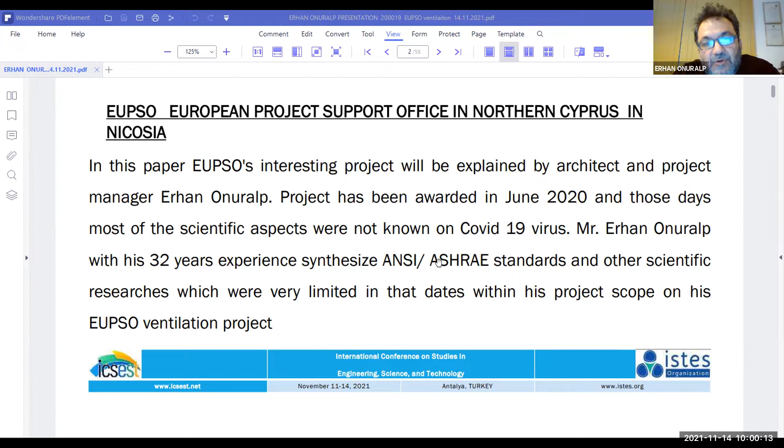From March 2020, we had the COVID outbreak in North Cyprus, and because of this, the project needed to be prepared urgently. But we had problems at that time — in 2020, we did not have enough data or knowledge on what to do against COVID spread in interior offices or interior spaces. So I took the responsibility and initiative on behalf of my team.

After big research about ventilation theories, we found out that displacement ventilation theory is very close to our aim of getting rid of COVID viruses in office spaces, to clean the office spaces from COVID viruses.

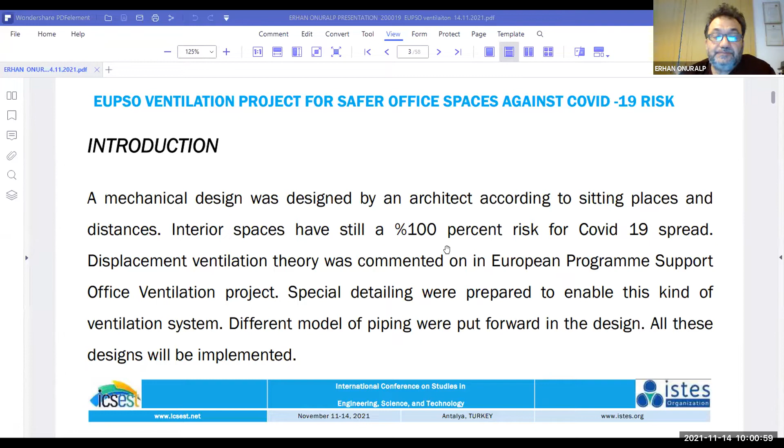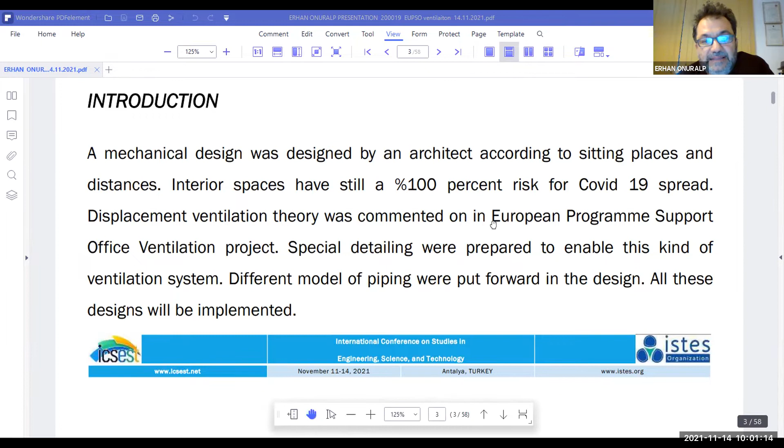My client also asked for a sample of a guarantee to have 100% risk removal — 100% removal of COVID spread in the spaces.

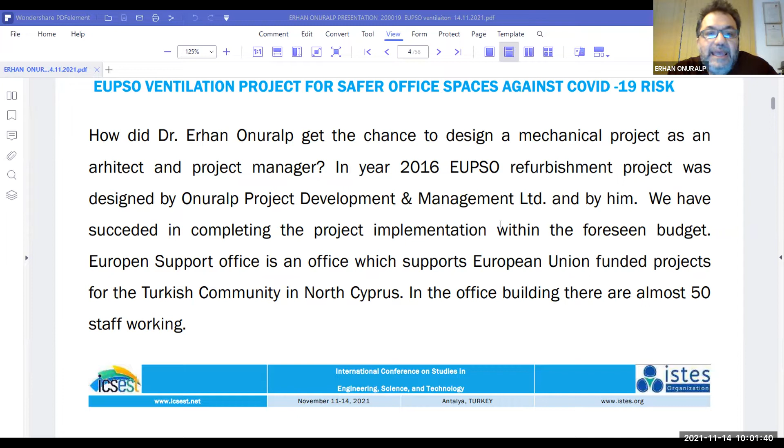European Support Office, EUPSO, is an organization that supports projects for the Turkish community in North Cyprus. I had also done their refurbishment project before, in 2016, and their project for internal space design.

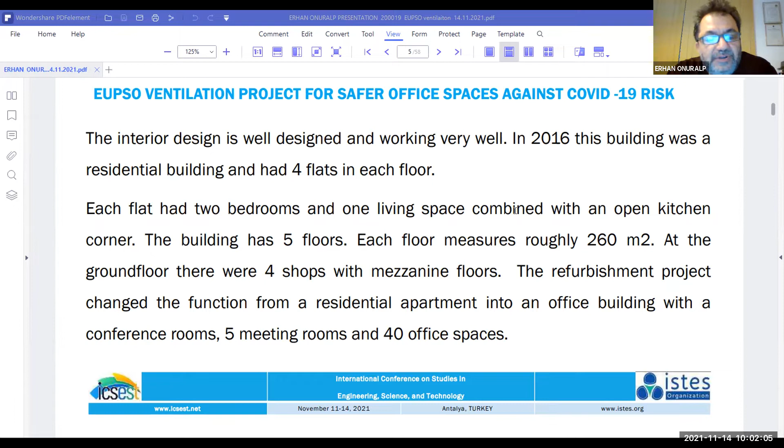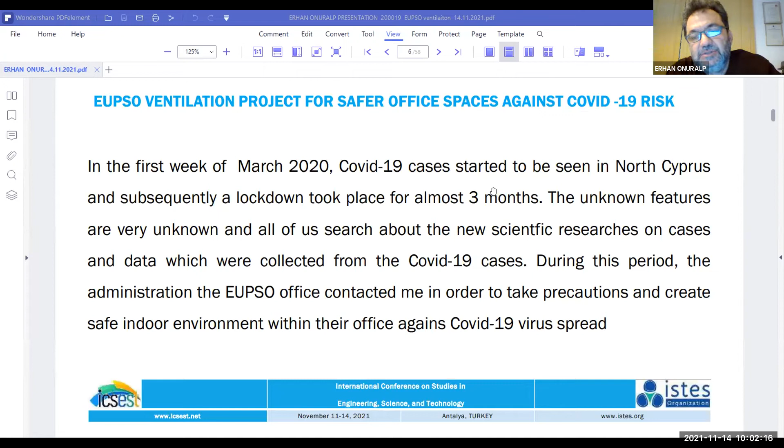We have 260 square meters on every floor, a 5-story building, and also a ground floor. On the ground floor we have the conference rooms and the entrance. This building is also renovated from a residential building, which we converted into an office building.

In May 2020, we started designing our project, and we clearly came to a point to have our layouts for the project.

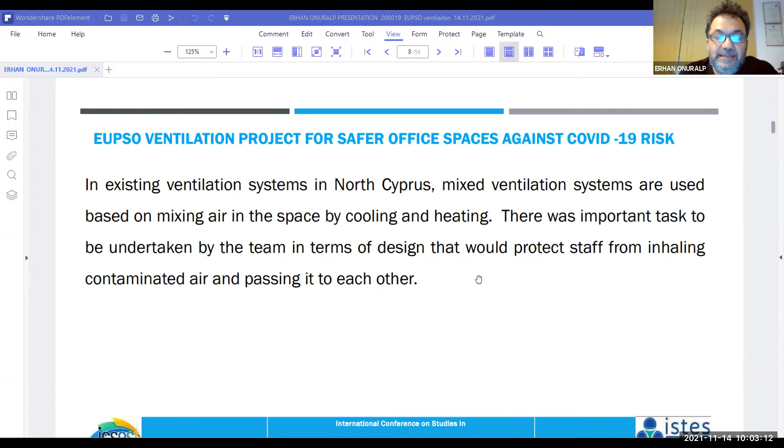According to our research, before the COVID outbreak we had a ventilation system, a mixed ventilation system. Because of this mixed ventilation system, we have been living with problems nowadays also, because the ventilation mixes the air inside the space, and when it mixes, it gives too much danger to the people inside the building. Now I am going to pass to the building.

I want to show the building to us first of all, from the bottom.

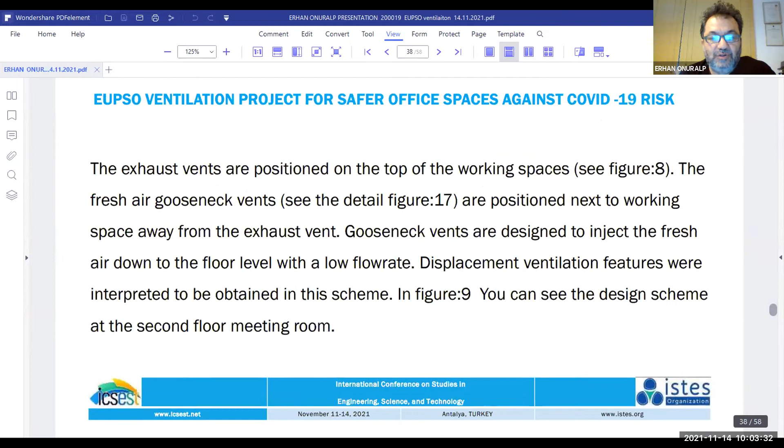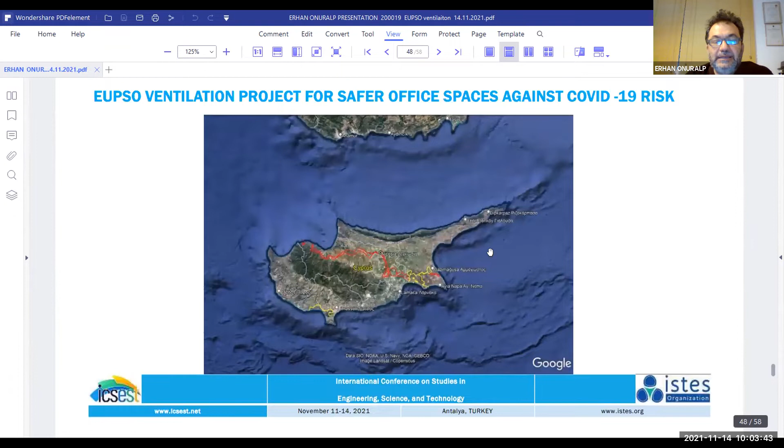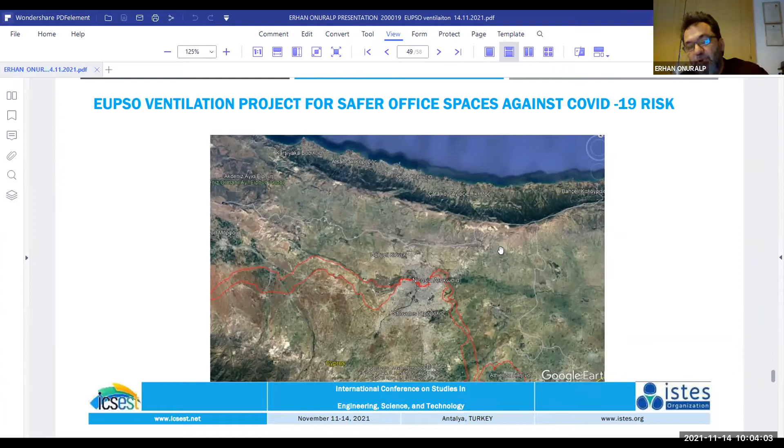Yes, we are in Cyprus. This is Cyprus in the East Mediterranean Sea, and the office building is in Nicosia. Nicosia is the capital city of Cyprus, and we have this type of border — two sides, south and north. The north side belongs to the Turks, and the south side belongs to the Greeks. This is the walled Nicosia, and our building is close to here.

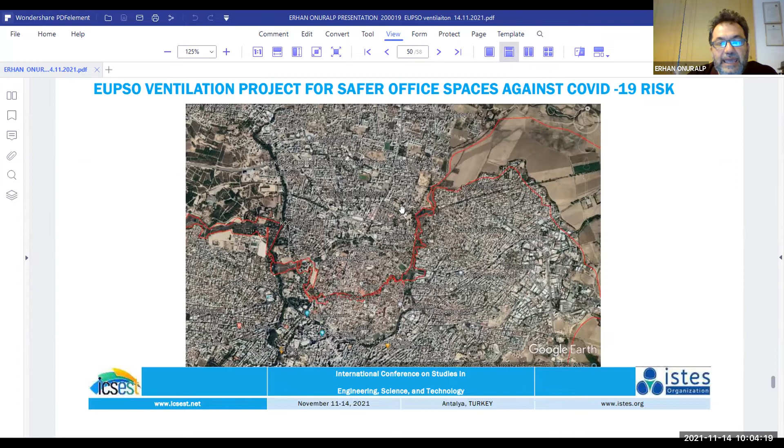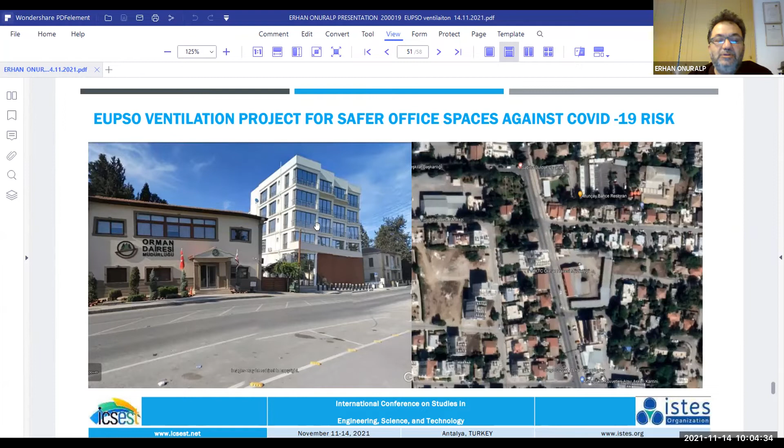This is our building, and this is the site plan of our building. This is the road, and the road goes to the north. This is our building that's going to be projected for ventilation.

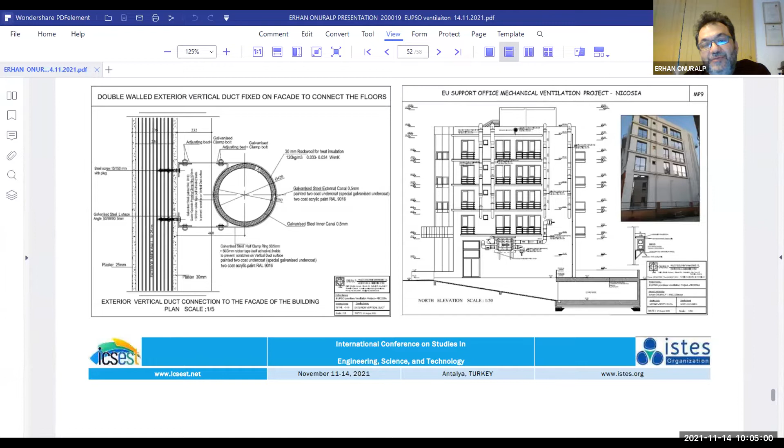I prepared this paper for the guests to show the architectural aspect of the ventilation system from the beginning. The drawings are like architectural drawings, the details are architectural details, and everything is handled differently.

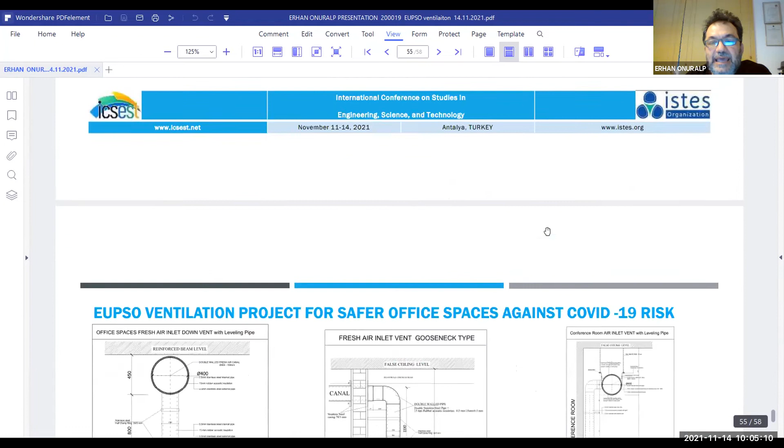On the ground floor, we have our conference room, and we have the ventilation — fresh air ventilation and exhaust ventilation pipes, two pipes. In this project, we have a different interpretation of ventilation: we take fresh atmospheric air inside, and we take the polluted air from inside the space to the outer space. So we have two pipes.

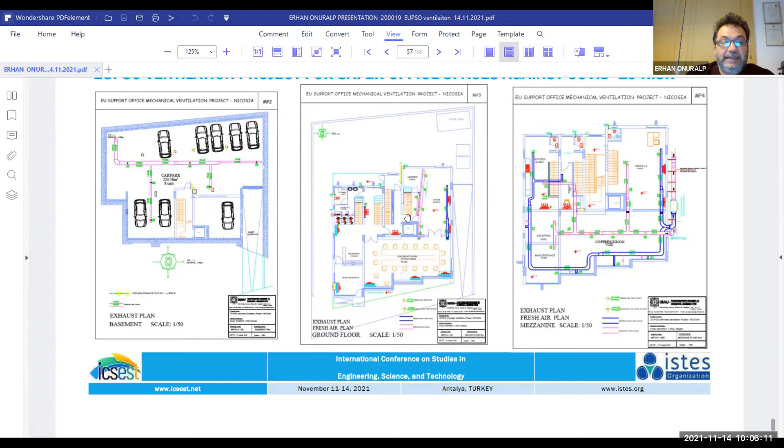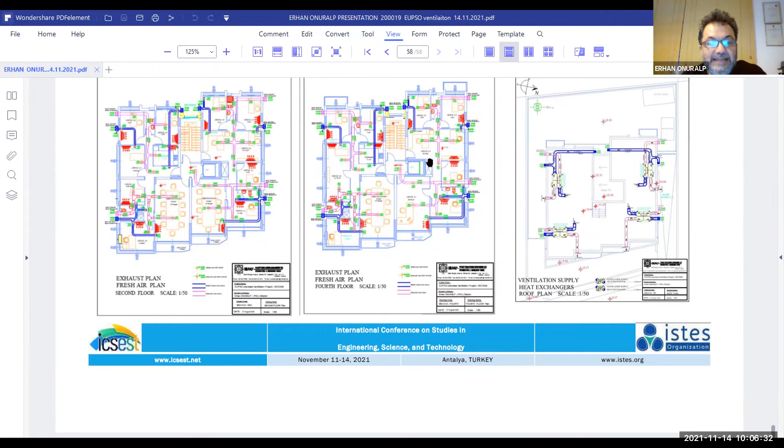One is fresh air, the blue ones, and these are the violet ones, which are the exhaust airs. So the machineries are at the top, and remove the air from the building. And every floor we have this type of short pipes that continue at the ceiling. They are short pipes, which is more efficient.

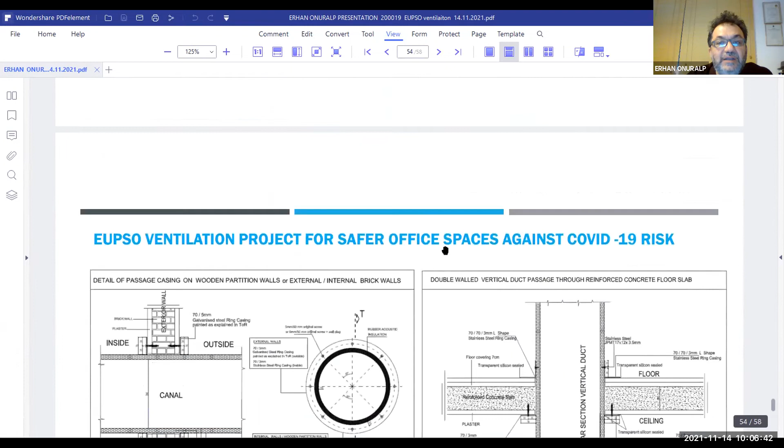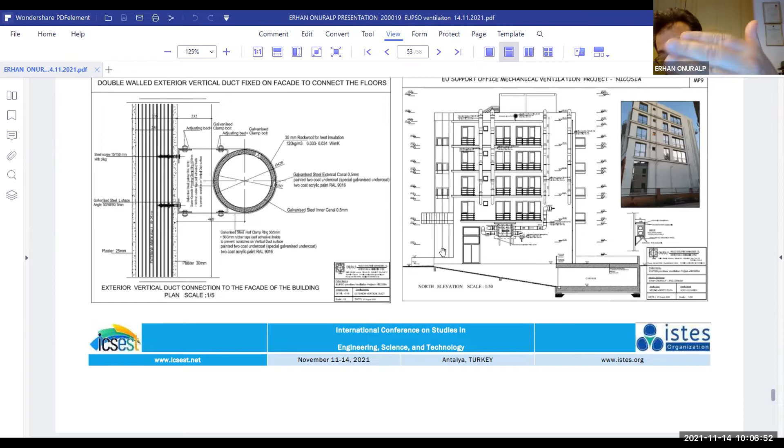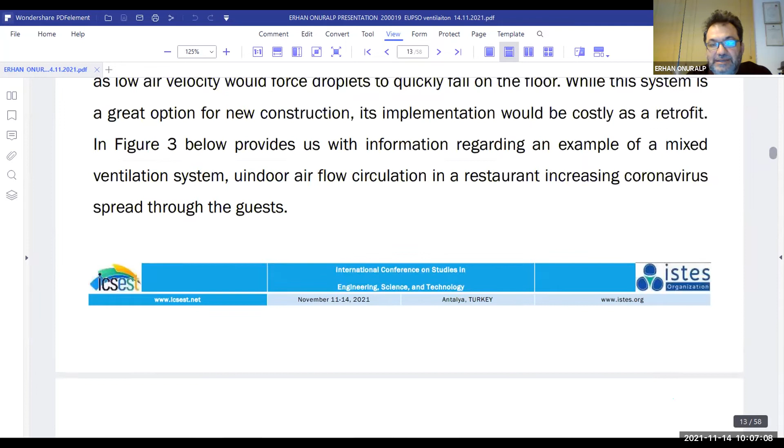So the problem is here that we are doing this while the building is in use, and we are now implementing a project of ventilation here. So for our ventilation scientific outline, if you can understand the project simply, I think we can come to what's the problem in front of us.

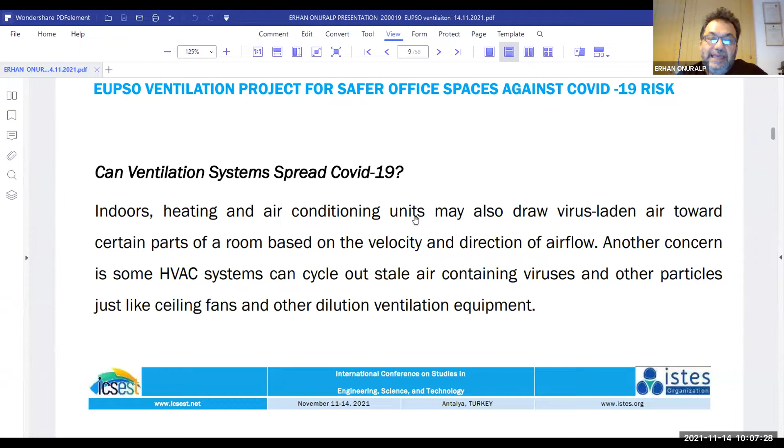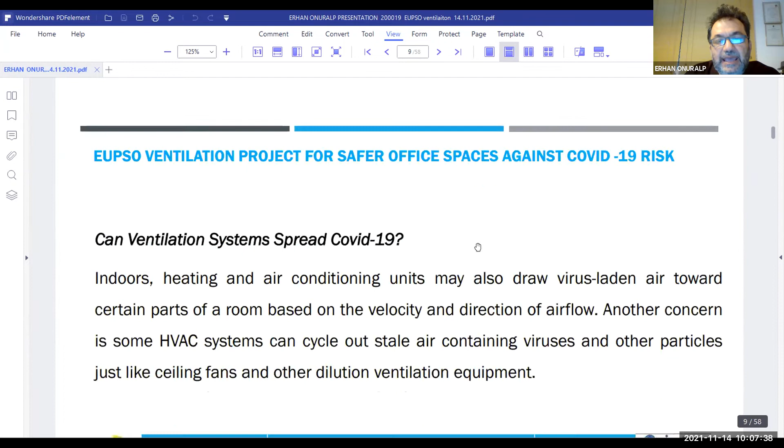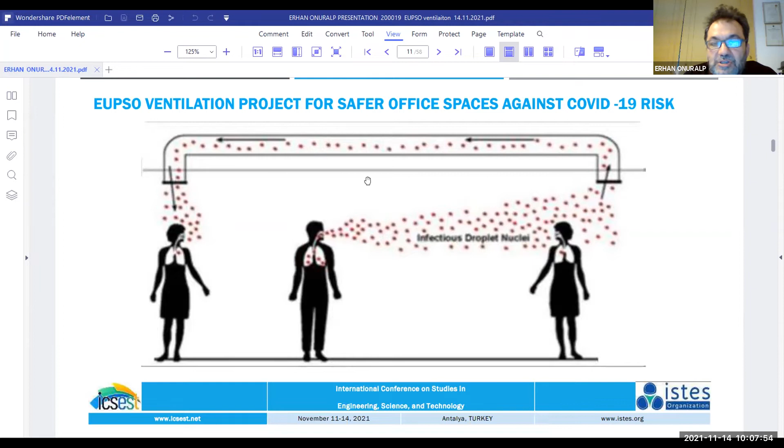The first problem is: can ventilation system spread the COVID virus inside the building? So we should take precautions about the ventilation system and keep this danger in mind. Here you see these pipes can also carry the droplets, nuclei of the viruses between the spaces. So this is also taken into account, and we have precautions about that.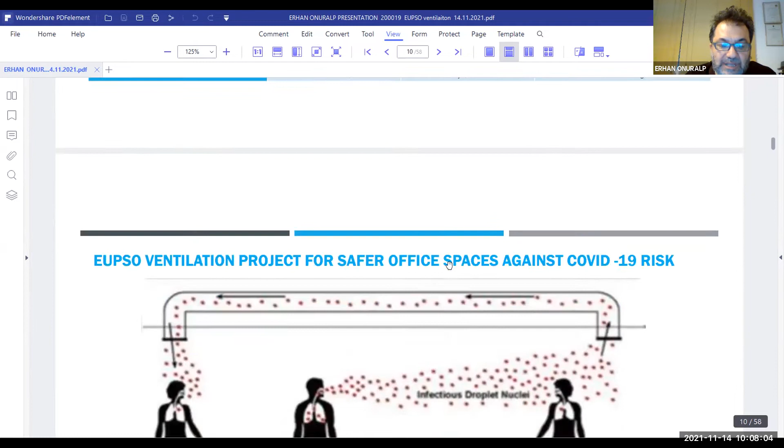So we select displacement ventilation. So what is the displacement ventilation?

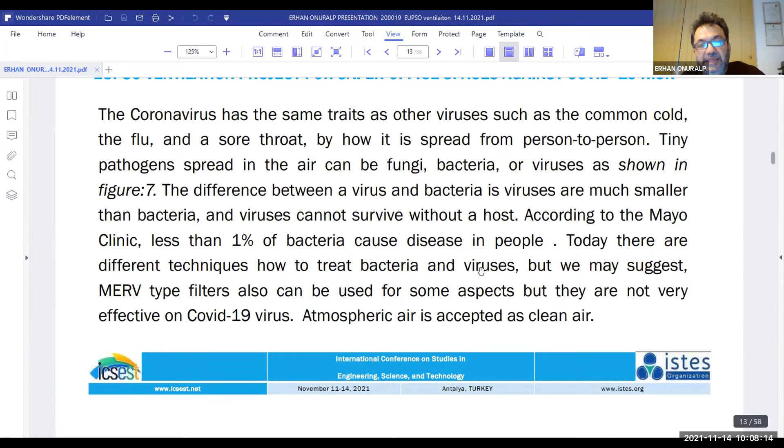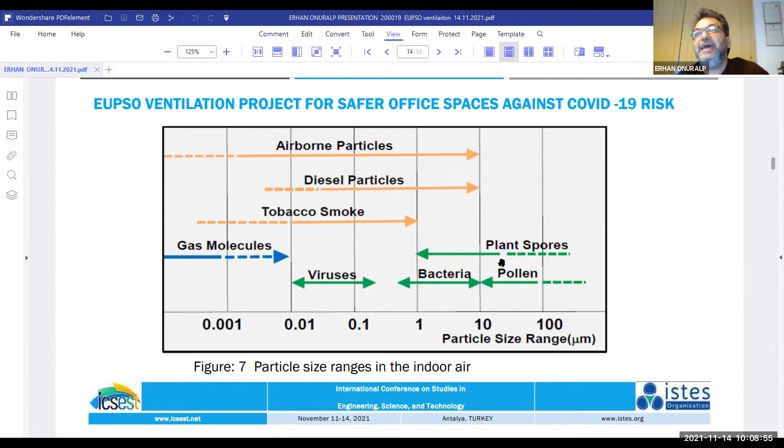The other thing is that we should know the particles of the dangerous effects. One is the viruses, gas molecules, tobacco smoke - these are particles, airborne particles, bacteria, pollen - and these are dangerous effects. So we should use a filter, a very highly developed filter, HEPA filter, in front of the fresh air canals, to filter the atmospheric air very clean, to create clean air inside our building.

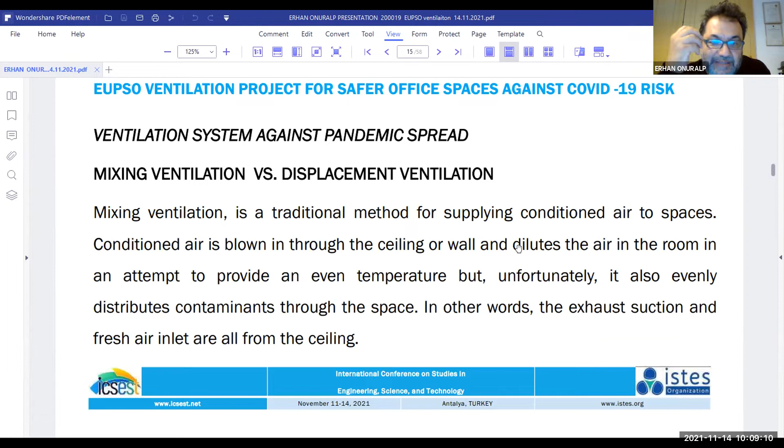So we take out the mixed ventilation theory, and we put in our displacement ventilation theory. What is the displacement theory? This, for example, is a sample of a restaurant which has mixed ventilation.

So mixed ventilation means you give the air from the same point and you take the air from the same point, and this creates turbulence in the space like that, and this turbulence creates a mixing of the air, and all the users here can be affected by the viruses.

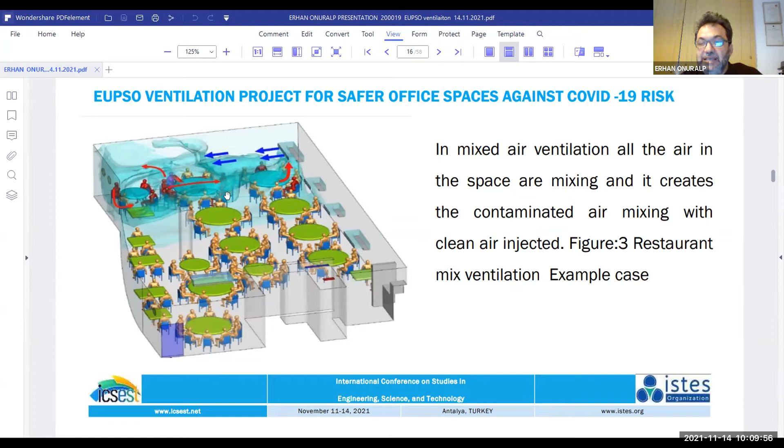So after this pandemic, the theory of ventilation changes, and maybe we are going to give up mixing ventilation, like that mixing ventilation where we give the air from the same place, mixing the air inside the building. We leave this type of ventilation, and we are going to displacement ventilation, where we give the air from the bottom of the space.

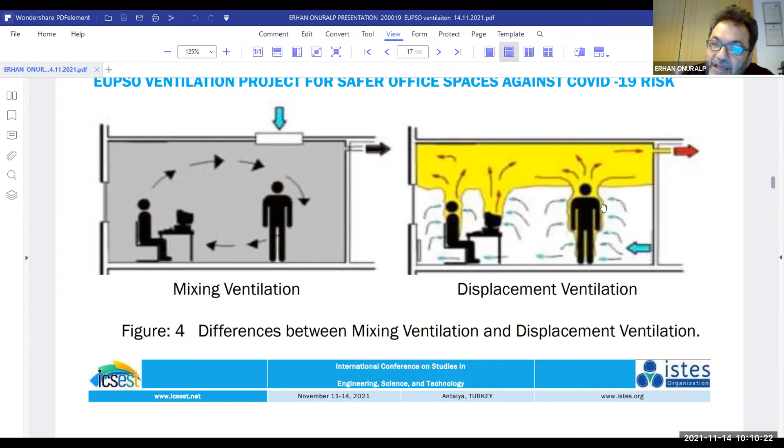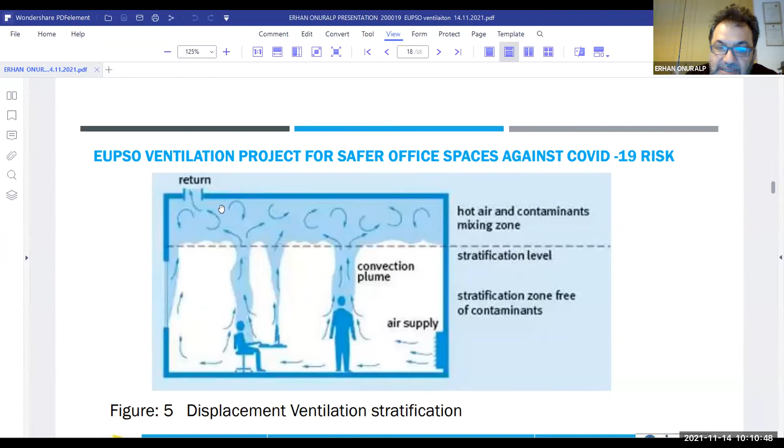And our convection plume makes the air go out, go up to the ceiling to create a stratification level, and hot air contaminant mixing at the top, and this will go through the exhaust fan, exhaust canal to the outside of our building. So this is the scientific base of our project.

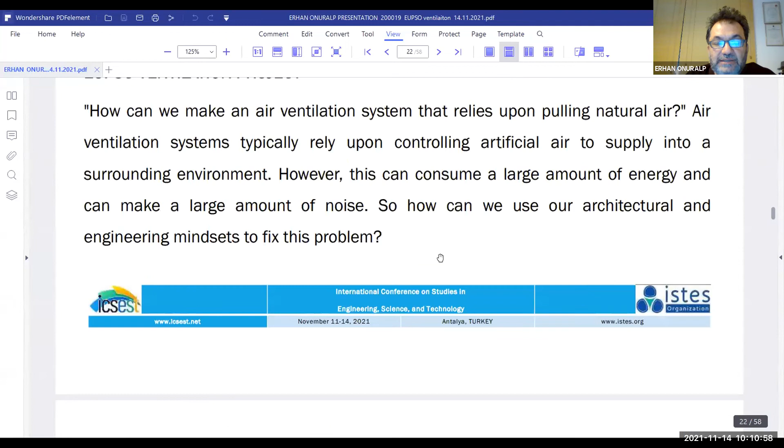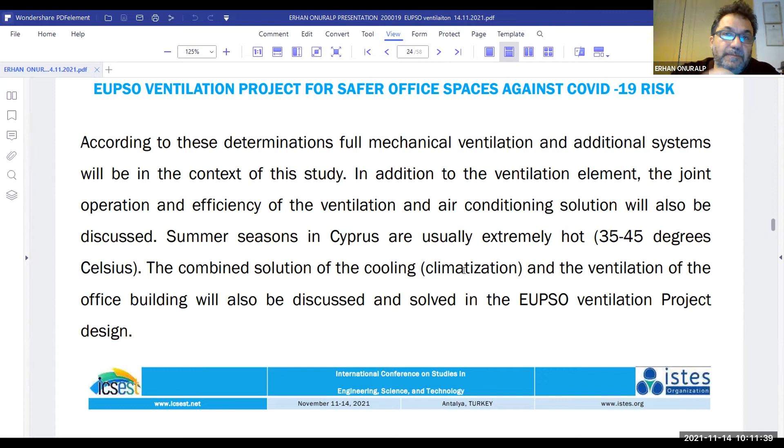According to determinations, what are the climatic conditions of our Cyprus? Cyprus is a very hot country, like 45 degrees in summer, and we have also 30, 34, 35, between these. So the climatization incident is very important too. So we should also cool the atmospheric air in a little bit, to come to 25 degrees as a comfortable level in the inner space.

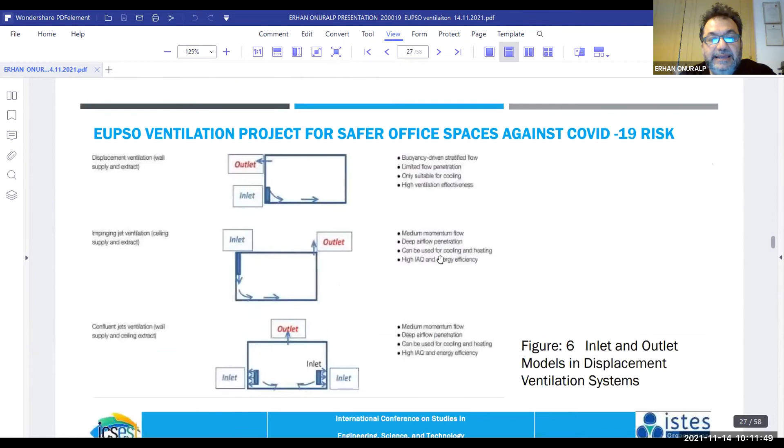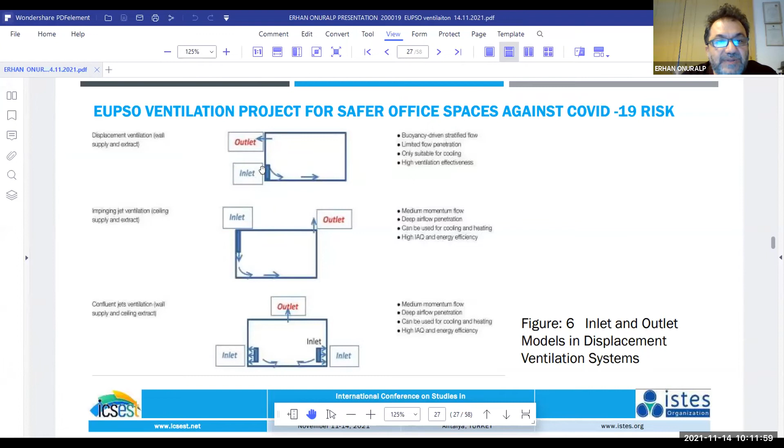So we are also cooling the air that comes inside the building. So here, as you see, we have the displacement ventilation. Displacement ventilation is inlet from here and outlet from here.

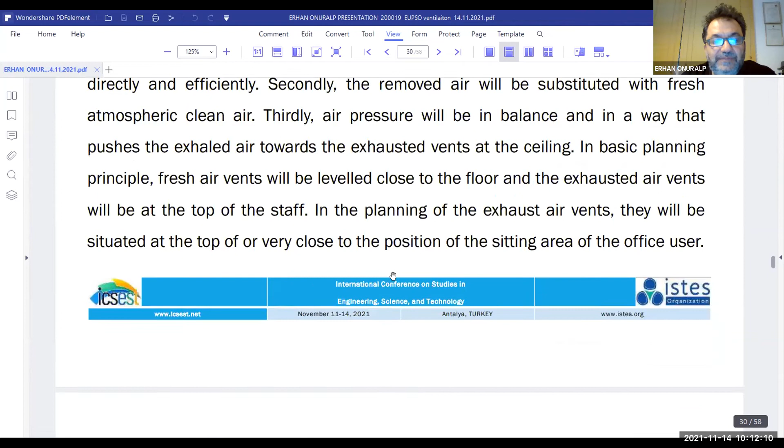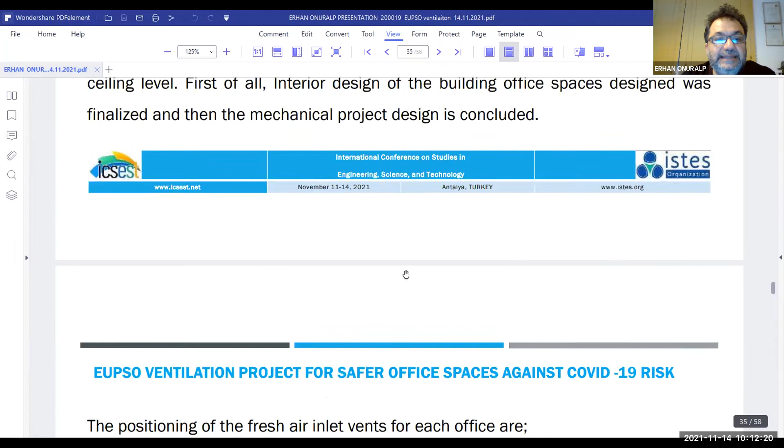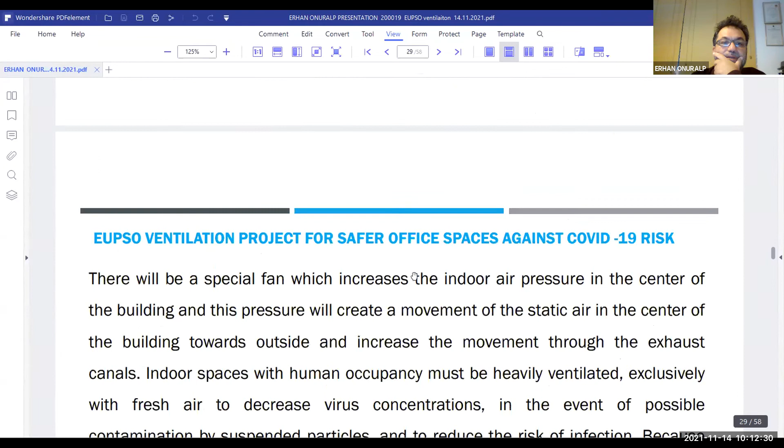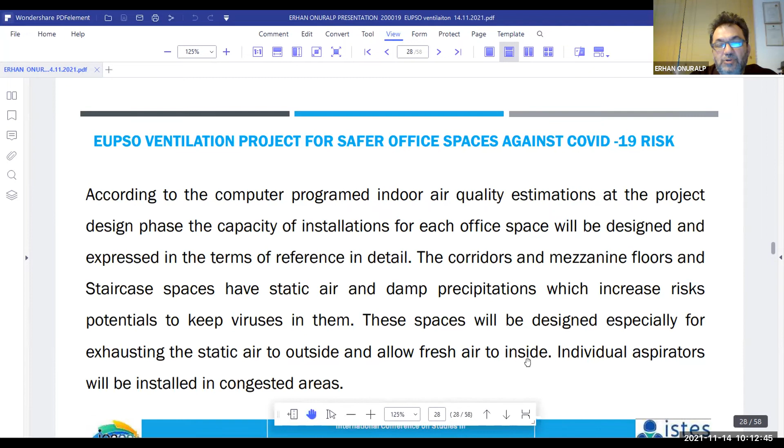I want to give this briefly because we have limited time. So what are the results of our project? The project is computer-aided designed. So indoor air quality estimations have all been done computer-aided, and all the calculations are made in computer-aided design.

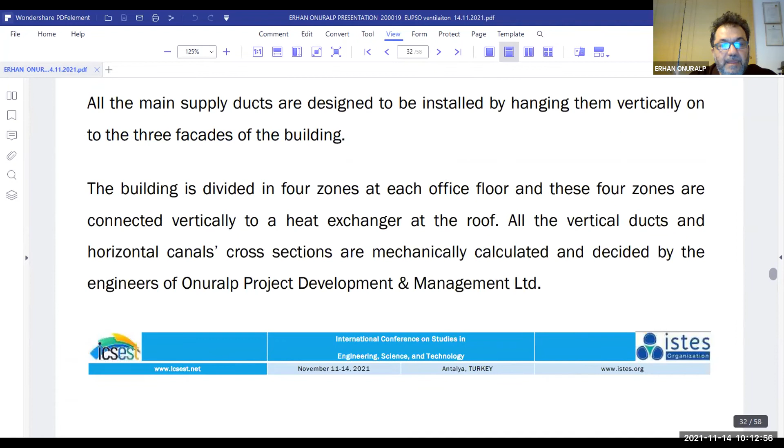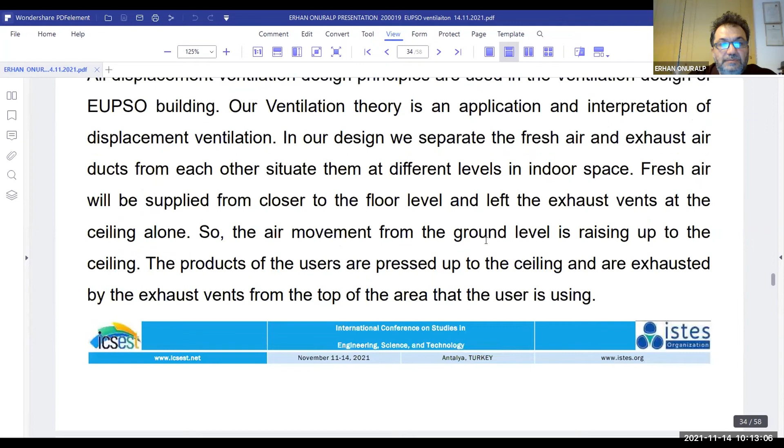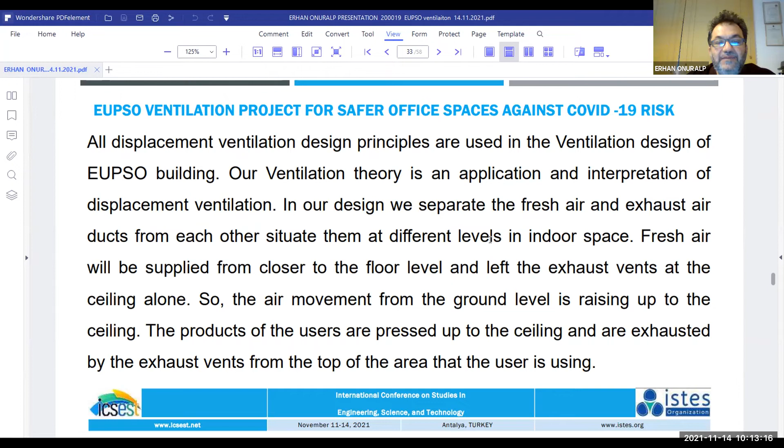So our ventilation theory is an application and interpretation of displacement ventilation. We put the fresh air in, as I expressed, and evacuate the polluted air. So the exhaust vents will be at the top of the ceiling, and also we have the fresh air inlet.

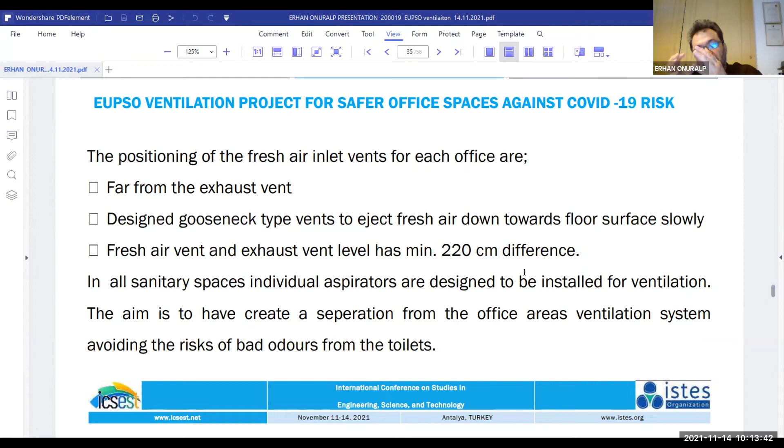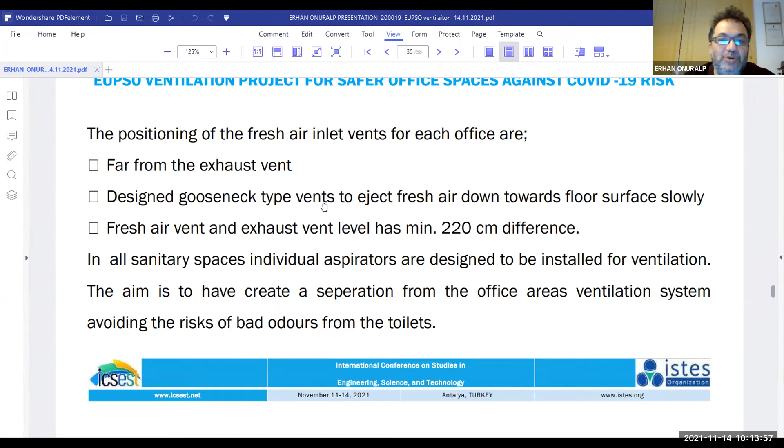So we created vents for fresh air to slowly bring it in. I designed different types of vents - this is a gooseneck type vent, which is new terminology in our project. We also have down vent type vents in our design.

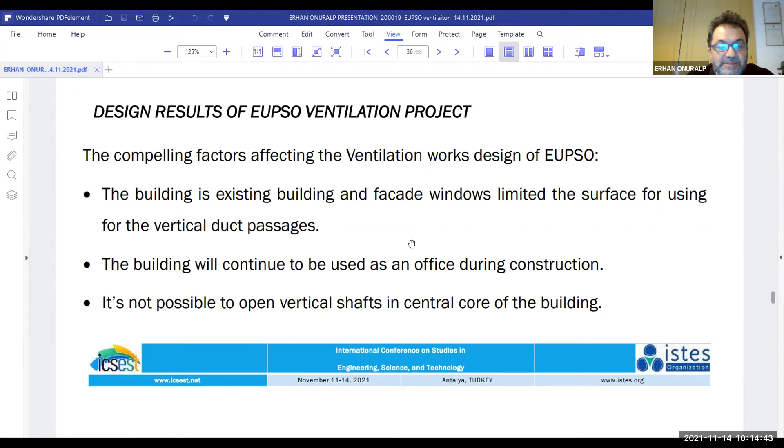In our design, the results are that the whole system will be implemented outside the building, with some parts inside. Because the buildings are occupied and in use, we put vertical ducts on the facade of the building and horizontal ducts inside, suspended under the existing ceiling.

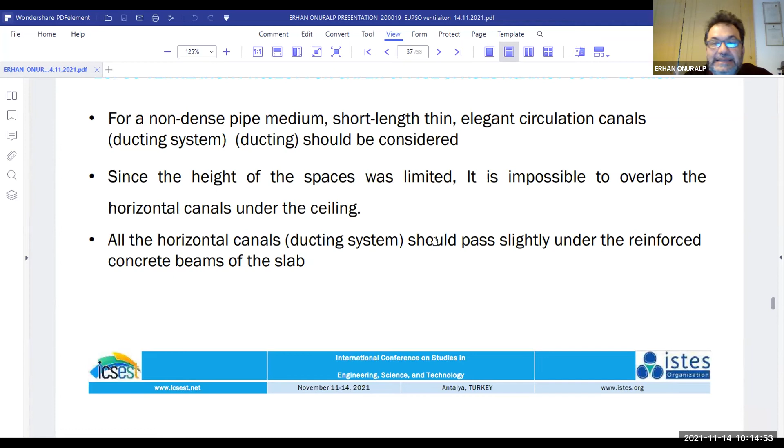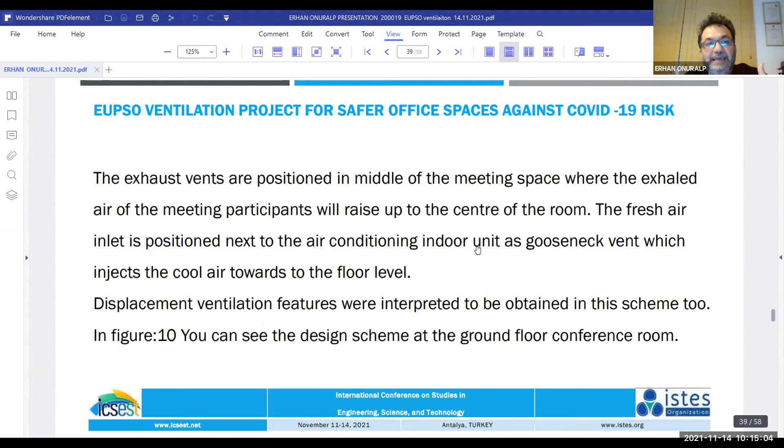We should also design elegantly around these pipes to give good internal views and scenery. For example, here in the office spaces, as an architect, I put the exhaust pipe above the people's desks, extracting polluted air at the top so exhaled air from the user's mouth can be rapidly exhausted rather than spreading into the space. Like in this meeting area.

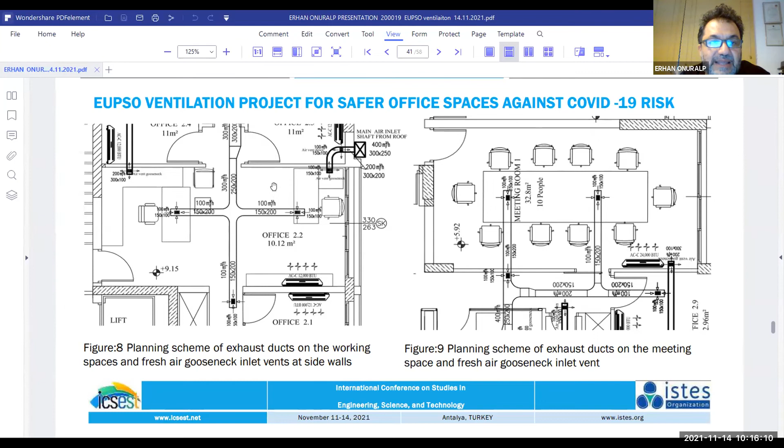We also have extraction of air from the middle of the space, and here we have gooseneck type canals giving fresh air very close to the wall, with down pipes bringing it down. So we separate the inlet and outlet far from each other.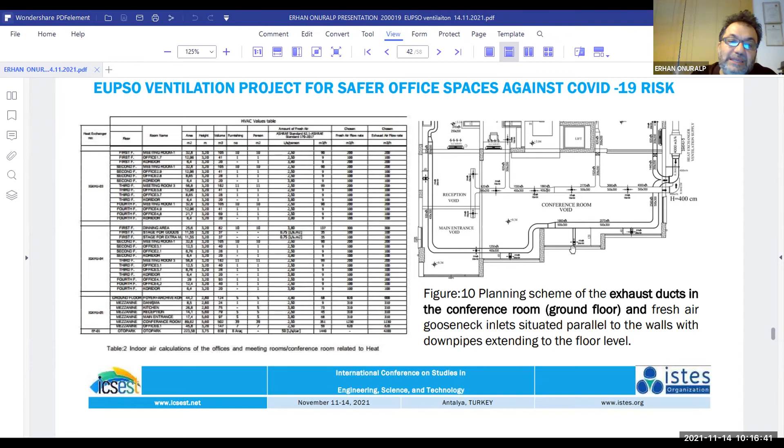For example, this is a conference room - these are the exhaust fans at the top of the ceiling, and these are the fresh air inlets. The pipes go down about 1 meter from the floor level, giving air at floor level and extracting from the top. This is a different type of ventilation system.

These are the pressure calculations for our project, showing how we pressurize the canals to stop contaminated air inside the canals from passing from one office to another, by maintaining pressure in the canal.

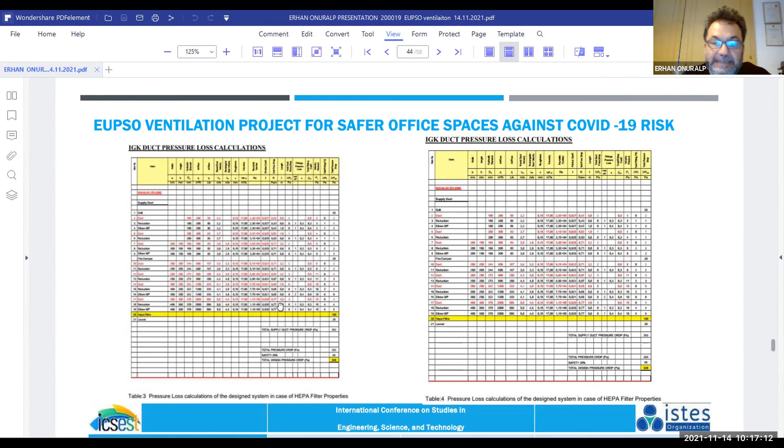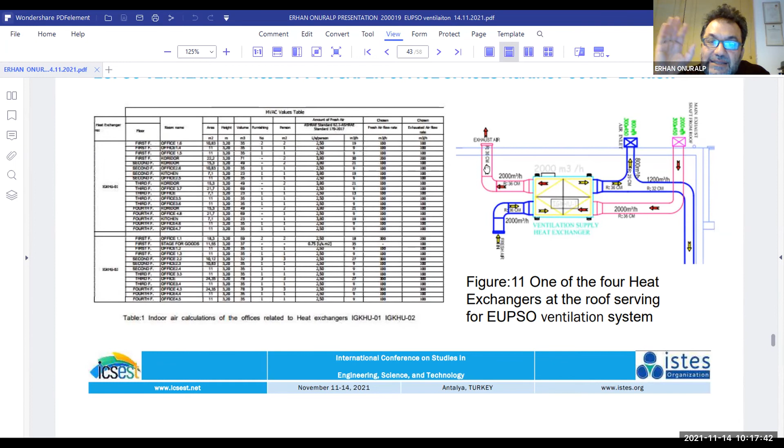These are the calculations of the volumes of the spaces, and this is the machinery at the top. As you see, we have no recirculated air - we have fresh air in, full atmospheric air, and the polluted air goes directly out of our building.

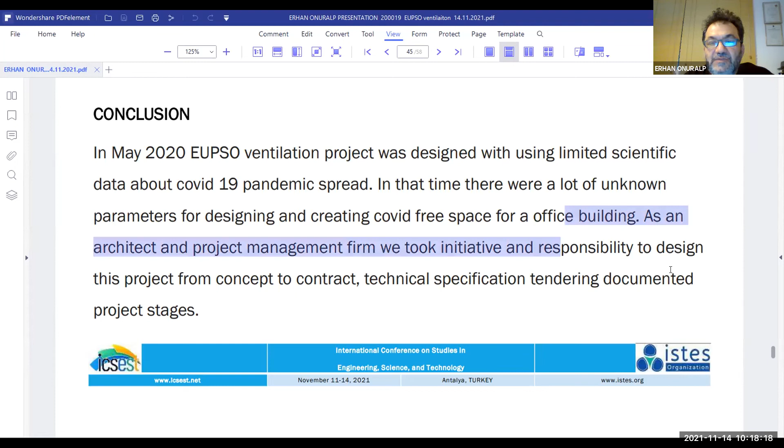So as we come to a conclusion, my dear guests - at that time we really had very limited scientific data about COVID spread, and there were a lot of unknown parameters for designing and creating COVID-free space for office buildings. As an architect and project manager, we took the initiative and responsibility to design this project from concept through to the contract, technical specification, and tendering document project stages.

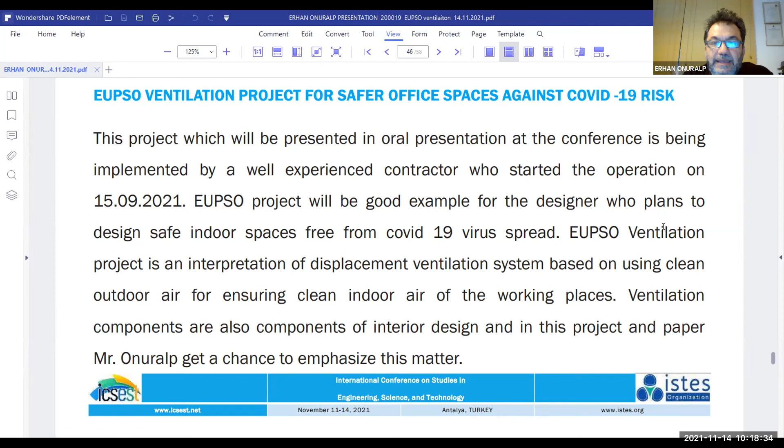This example shows us that the COVID pandemic gave us a very important lesson on ventilation.

The result is that we should always use clean air - atmospheric air, clean atmospheric air. We take the polluted air directly out of our space, and we put in atmospheric clean air, which is filtered by HEPA filter, refreshing the spaces with fresh atmospheric air.

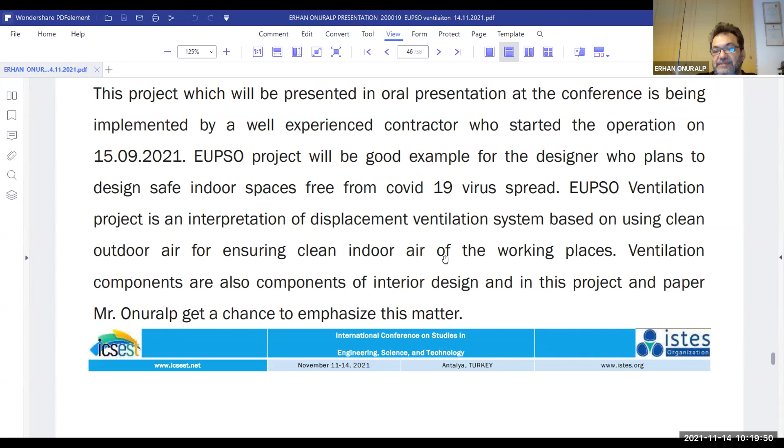Before the outbreak of COVID-19, we were cleaning and recirculating the same air - taking air from the space, cleaning it, and putting the same air back in. But now that is very dangerous, and this shows us we should bring new air into our spaces. I want to emphasize this with my paper, and I'm really thankful for you listening to me, and thank you for your time.